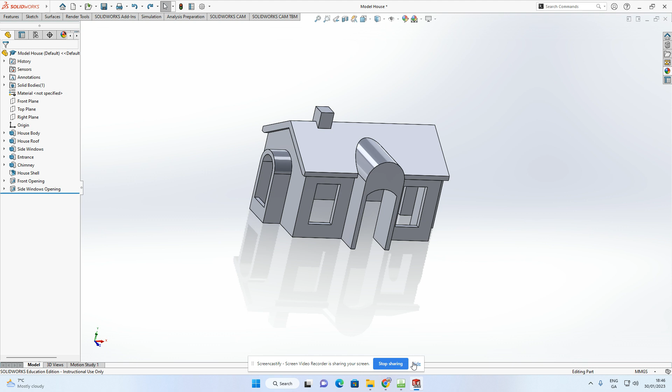Hi folks, welcome back to this last video on the model house. Essentially what we're going to be doing is adding some colors to the house to give it a little bit more life and realism. It's a very quick video on editing appearances, and it's an introduction for you to play around with now that you have it modeled. There are other things we could do if you wanted.

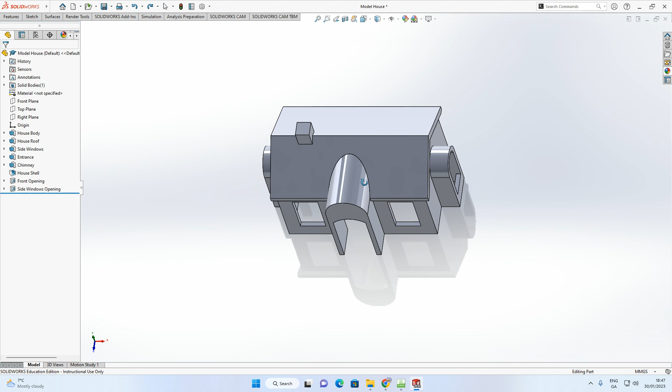It's very easy, let's say you wanted to cut a hole in that chimney, or add on maybe a little chimney pipe there. You could click on this surface, click sketch, and find the center of that chimney. If I was to join the diagonal from there to there using a center line, and then get a circle on the middle of the line, something like that.

Obviously smart dimension it, whatever is appropriate, I'm going to say 10. And with that, you can see my sketch there. I'm going to go features, extrude boss base, say blind, and go up 10 millimeters, that's perfect.

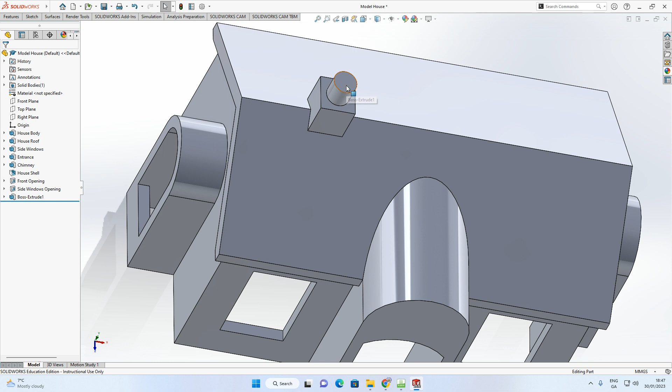Now with that done, it's very easy to come along here, sketch on this surface, click sketch. In my sketch I'm going to say offset entities, 2 mil, and reverse. You can see I'm doing it inside, and now I'm going to go features and say extrude cut, this time just say through all, and there we go.

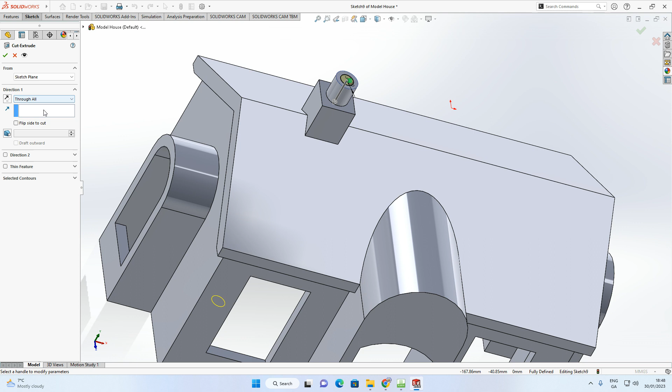You can see here now at the very tip top, depending on how I modeled it, that was where the square was, absolutely fine, I wouldn't worry about that. Might go a bit smaller, but you can see we've got now like a chimney or something like that as well. Just play around, maybe some little additions if you wanted.

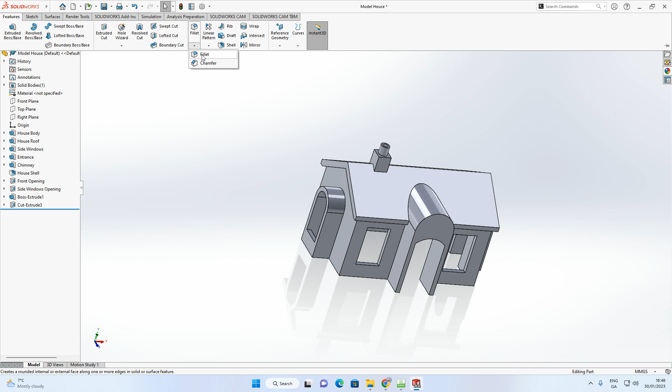You could go into your features and add little fillets and chamfers where appropriate. A fillet, just to explain what a fillet is, I'll change the size over here. If I change that to 4, I could select the edge here, and you can see it does a little round fillet there. It shows you a little preview.

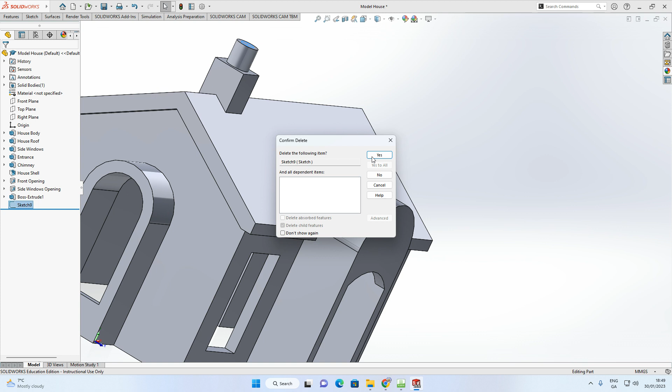I don't want to do that, so I'm going to press X, and I'm actually going to delete this guy here. It's just something you could do if you wanted. Right click on it, delete, click yes, the sketch will be left behind, I'm going to delete that as well. So anything that you do, like this boss extrude, right click, delete, and it should still leave us the little sketch, and the sketch is left there. I'm going to delete that as well.

Now that's something you could do if you wanted to play around a little bit more. Always use your own imagination to be inventive.

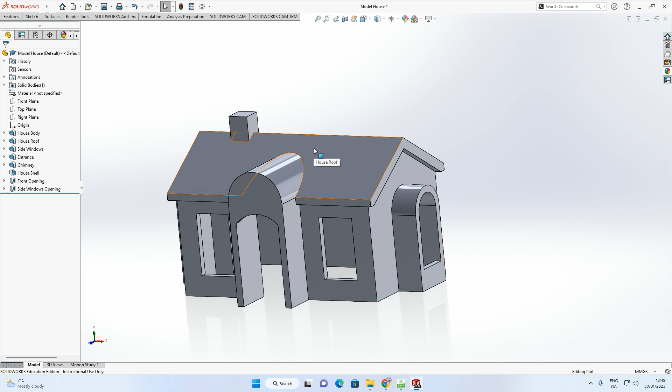Now, in regards to additional appearances, what I want to do is make the walls, the front entrance, the side windows, and the chimney all one color. I could go along and literally select every face and do it individually like that, but that is quite a time-consuming process.

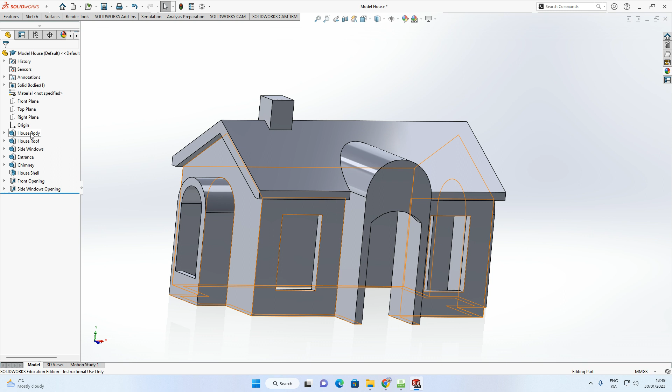So in your design tree over here, it's very easy to come along and select those individual pieces. So look, if I select house body, you can see the area that I've selected is all highlighted in blue.

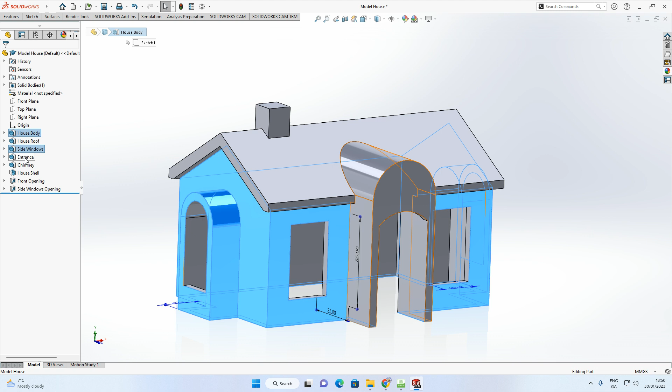Now, I don't want just the house body. I maybe want the chimney, the side windows. That's why when we renamed our features, it's very important. If you hold down CTRL and click on side windows, they're now selected as well. I also want the entrance, and then finally I want the chimney. And the last bit, will I select house shell? Yeah, I'm going to select house shell, front opening, everything there. I'm going to select all that and side windows. So you can see, I've selected everything in relation to the house except the roof. I held down CTRL for every one of them.

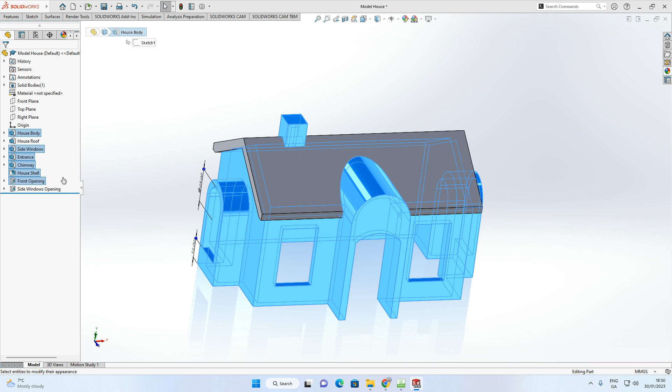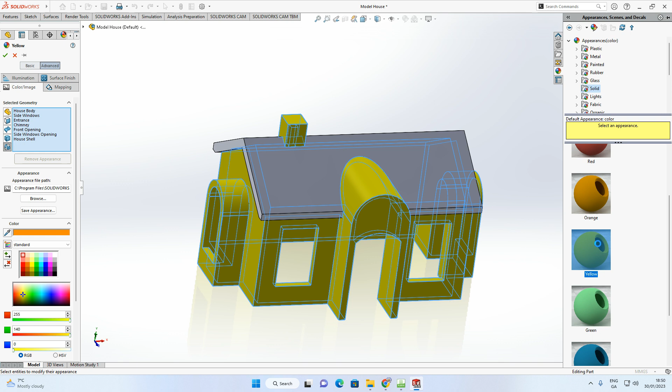I'll right click on one of them and go to appearance, and in this case I'm just going to say house shell, because that's the one I selected. I'm going to go with a solid color here, and actually go with the one on the sheet. I think it's like a yellow. Then we're going to go with a dark roof. Actually oranges, go to yellow, maybe something a little more like that, I think is a little better. I'm happy with that color now.

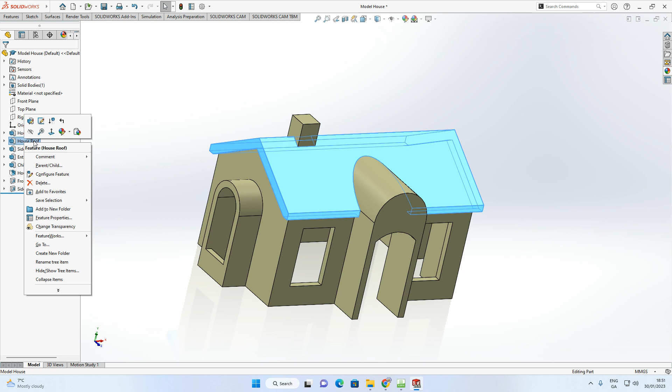Now I want to get the roof. I could select this surface individually and do it one by one, but it's easier to come over here, select house roof in my design tree, and the whole surface is selected. Right click on it, house roof — let me do that again, sorry — in the house roof section, select it, right click on this appearances icon, and then this one here, house roof.

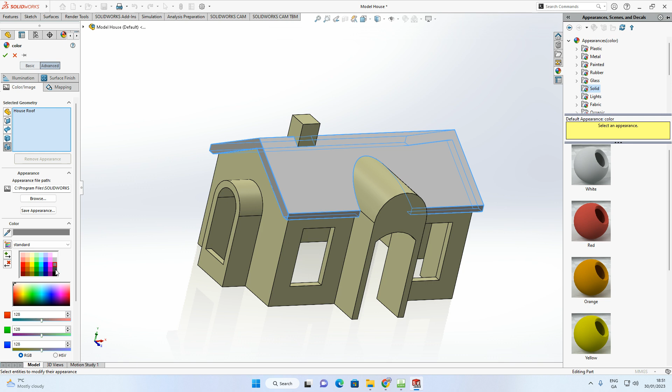Once again I'm just going to go with a solid color. In this case I won't go with white, I'll go with kind of a grey. I can choose it over here on my little color wheel. So darker than that, darker, darker — might go with that, yeah, I'll go with the fully dark one. And there you go, the house roof is done.

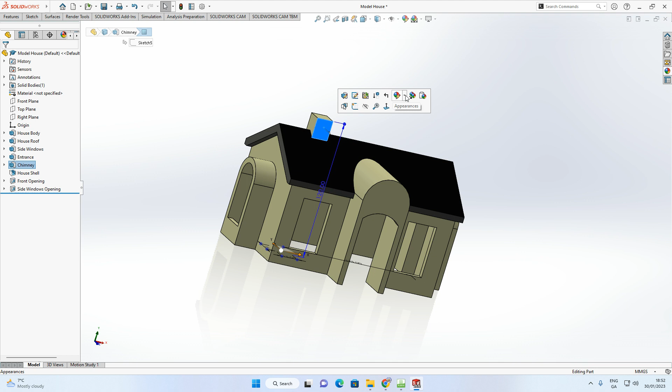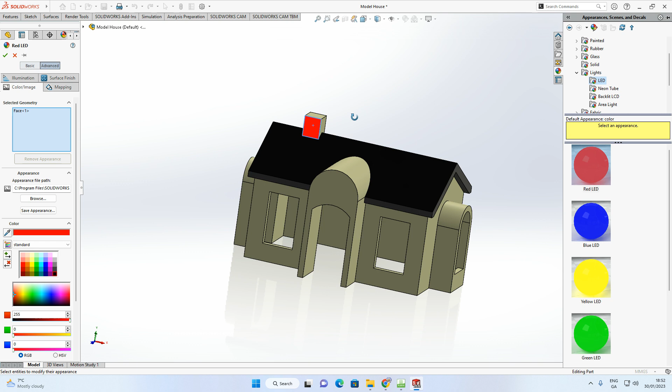Now, there's nothing wrong with going along and playing around with some of the appearances here. If I wanted to do something individually, let's say this face here, I could select an individual face, and you can go up to the appearances wheel and just change the face. So let's say I wanted something different on that face — just playing around with something here — I could go into lights, go to LED, and press a red LED light, and that will appear on that surface. Now that's obviously not appropriate for what we're modeling, but it's just showing you that you can individually select faces as well. After that, I could individually select multiple faces if I wanted to change them in one go. I don't want to do that though. I'm quite happy with this, and that's my model house done.

Okay, so that's that video done, guys. A little bit on appearances there, and just editing the actual surfaces and features, and how useful it is to actually use your design tree to change the appearance of something rather than editing it face by face in the model. So that's that actual project done there, guys. I hope you found that helpful.